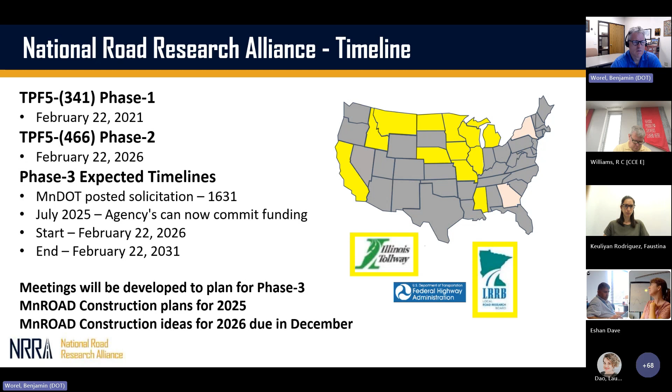So some activities that are going on at MnROAD. Again, construction ideas for 2026, we do have test sections available on the low volume road. So get your ideas in. We can have a little more time for planning for construction in 2026, but that's due in December of 2025, I should have stated.

So when I talk about phase 3, it's the same membership, full membership for governments, agencies, including the tollway, 75 a year or 150 a year for Minnesota. So that hasn't changed, that'll be the same. But there are a couple options that are going to be available.

Minnesota is working on having an implementation focus. If you wanted to add 30,000 a year to that, we could do some different things for implementation. It could be looking at different reports, but again, something we need to talk more about.

There is an option that some states have asked for, which is additional travel. In the pooled fund solicitation, it talks to it a little bit more. Minnesota's not going to do that, but for 10 grand a year, you get some more trips in there. And also there's an option like we've done before in phase 1 and phase 2. Federal Highway did this, Missouri did this.

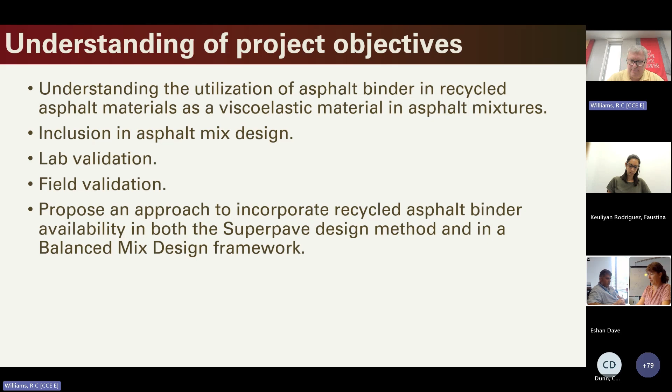It goes through, we're going to be conducting a survey or synthesis of NRRA member agencies' practices. We want to look at identifying test sites for high recycled asphalt material mixes. That's going to inform our experimental plan. Conduct field sampling and data collection.

Then, as is rather standard in NRRA projects, there's a 1-year annual report update. Then we're going to be doing lab testing, field distress, and performance data analysis. Hopefully the year 2 update coincides with the final report and publication. And along the way, there are presentations that members of the NRRA are welcome to have us provide updates on.

We can dive into the details of this, but basically we want to ensure we have captured the literature and what's the state of the practice, understanding what the NRRA member agencies who are funding this project do in practice, and seeing if there are opportunities to integrate that into our program and provide them with candidate, potential updates to what they're doing.

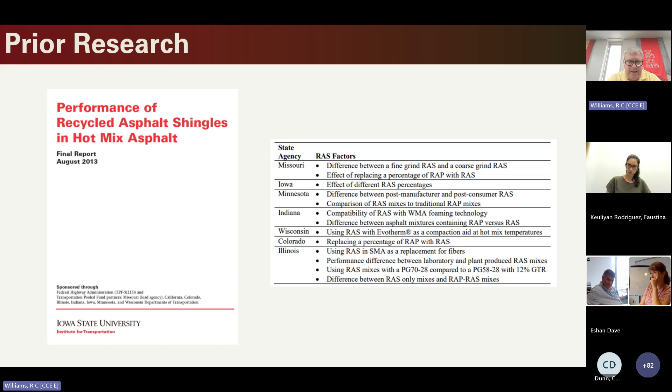Anyone who's worked with me knows that I have these storage facilities where, on larger projects like this one, it's kind of like the Indiana Jones movies, where you store your materials. So I have some of the materials in storage from these projects as well as other projects, and they could be useful in this study.

So then, development of the experimental plan. We're going to look at selecting what we call the control mixes, and test the control using ideal CT, disc compact tension, ideal RT, and the Hamburg test. We're also trying to identify the binder availability factor for the RAP.

We'll look at what the dosage is for the higher RAM mixes, and test the mixes using the ideal CT, DCT, ideal RT, and Hamburg. So, here's our standard mix design, which produces this binder content. But if we look at this binder availability concept, then is there an adjustment to the binder going in there?

Then we're looking at plant mixes. So again, plant mix, lab compacted testing, binder testing, RAP testing. The other thing we have the ability to do is...

We have some advanced systems where we can take the asphalt binder and create the SARA fractions in 100 to 200 gram fractions, per fraction, in less than about 20 hours or a day. Usually what we do is take those fractions, and we have the saturates, aromatics, resins, and asphaltenes, and then we look at some transition points in these fractions, so we can control exactly the molecular weight and how we divide these fractions.

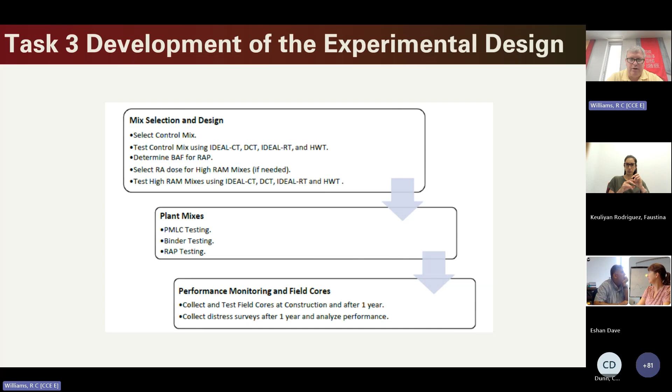Here we just have some examples of what we might be looking at in the experimental plan. Again, these are just hypothetical situations. So as we move towards 30% binder coming from recycled asphalt materials, it's going to be increasingly difficult to achieve that binder grade simply using, let's say, a crude petroleum material that has lower molecular weight to meet that spec.

And so then you're going to move into other kinds of recycling agents. AASHTO has a list of recycling agents that are qualified, and there could be other ones, but I'll leave that up to the NRRA panel to guide us on what they want us to examine. This is an example of what you can find with some of these blends that we see. And then if we look at the binder availability factor and apply that, how that virgin AC could increase.

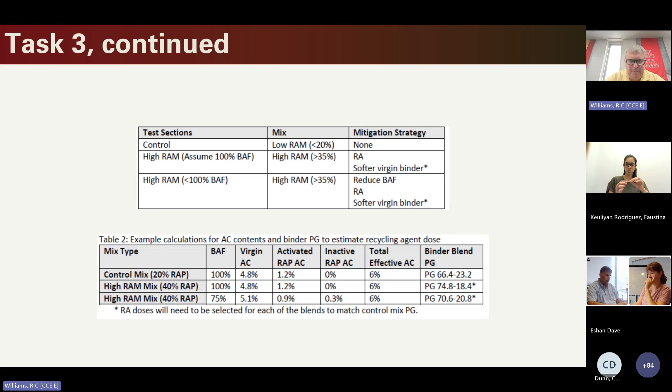Then we'll progress to the field sampling data collection. I think, of course, we're going to need to look at the plant type, the method of how the recycled material was added, the silo storage time, production rate, haul distance times, etc.

We can, on the one hand, be at a portable plant, 300 ton per hour production, could be a little bit further haul distances. But we could also be at a facility that's pushing 1,000 mixed tons an hour. They light the burner at the plant at 2:30 in the morning or so. They've got 12 silos. You're filling the silos up, and then the mix is sitting in the silo for 4 hours maybe for loadout, or even longer.

So there's things that I think we should go through and document what's occurring in the material production. Along with that, looking at mix temperature, compaction temperature, laydown operations, collecting the QC, QA data, and things of that nature. Looking at the mix constituents - if you're going to have a quartzite based mix, you're going to have different absorption values than, let's say, a limestone mix. So we need to keep track of those things as well. And of course, we'll be obtaining field cores.

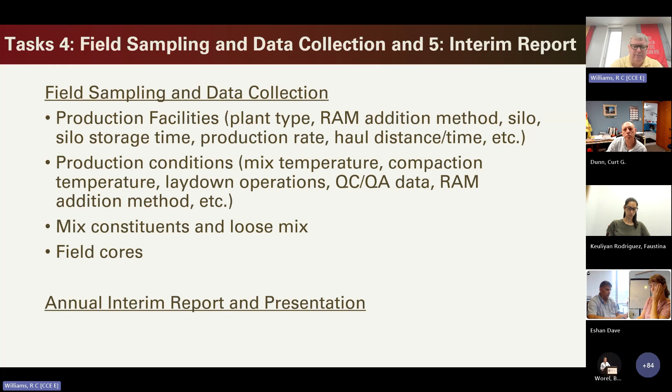Chris, sorry to interrupt there. Could you wrap it up maybe in just a half minute here? We've got some other updates here too we've got to get through.

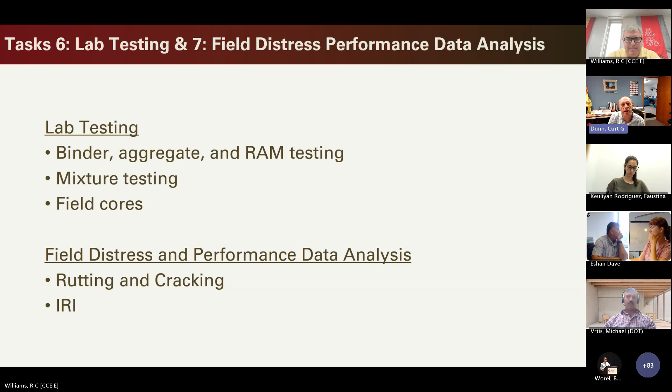Well, okay, sure. Anyway, I think all this is posted online, and so then we'll make the recommendations, and the oversight committee will review those and we'll adjust as appropriate. So I'll just say thank you and take any questions people might have.

I think we'll thank you, Chris, and if there's any states out there that would like to go in on this study, please let us know. So, just to stay on schedule here, thank you very much, Chris. And so I have - pardon me. Yeah, no worries, appreciate the opportunity. You bet. And so I'm going to turn it over to Michael here.

He's got a couple-minute update before we can move on, on some things happening at the test track. So go ahead, Michael. Were you going to share your screen? I'll bring it up. Yes, I will. Yep, all right, I'll bring them up here.

Yeah, thanks again, Chris, for sharing for the Flex team. Just wanted to give a quick MnROAD update on everything asphalt related, a little bit PM related, and let everybody know - really just planting the seed. And if you want more information, please contact us.

So we are removing the spray rejuvenator test sections on the low volume road. These sections have been in place for 4 years. We are at the end of the research contracts with those. We have year 3 testing that we recently funded through the PM team.

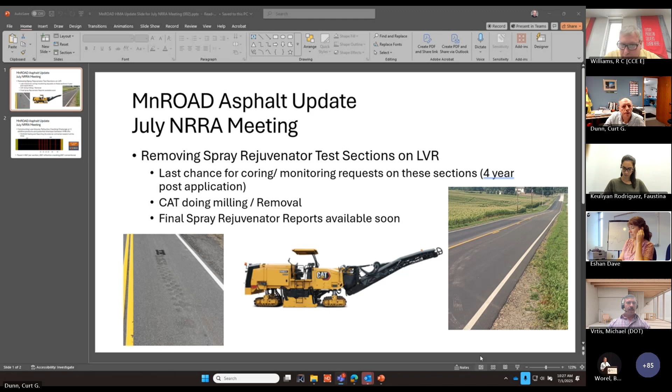We're going to be using this real estate. Caterpillar, through the MnROAD Caterpillar partnership, is going to be doing milling to remove those sections. They're doing something similar to what we did through the University of New Hampshire during MnROAD's last construction effort, where they're looking at mill speed, rotor spacing, tip spacing, those kind of variables. They're going to be playing with this area to mill up and remove those sections.

In place of those, we're going to be constructing a low volume road version of the MnROAD NCAT additive group, or MnROAD reflective cracking sections, where we have 3 different additive products. We're going to take our typical 400-foot test section and cut it in half. We'll have saw cuts in the lower common lift, and then evaluate both the low temperature cracking in the uncut portion and the reflective cracking in the saw cut underlying lift portion.

We're planning on giving a more thorough update in the July or August Flex team meeting, so just wanted to plant the seed here. Again, contact us if you're interested in learning more about these.

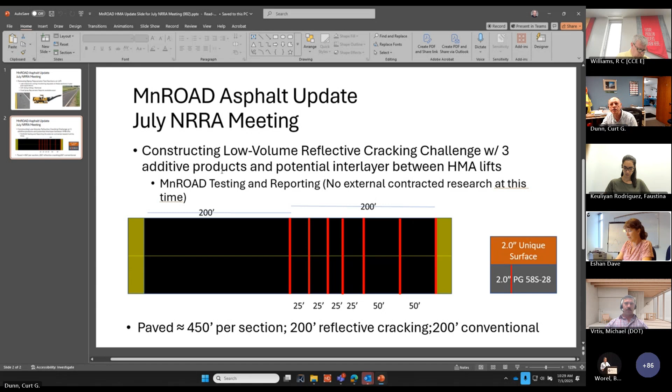Thanks, Curt. Okay, very good. Thank you, Michael, sounds like a really great thing going on here. So with that, I think I'll turn it back over to Ben.

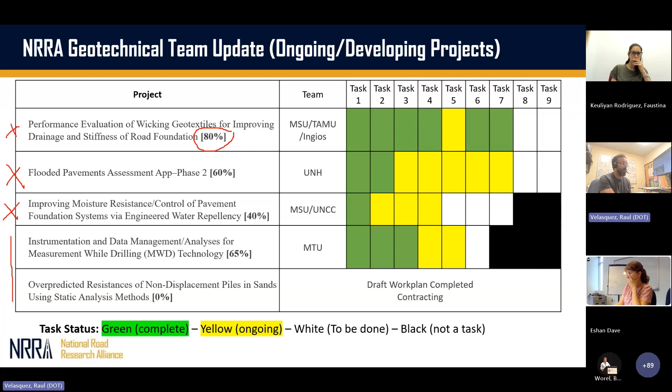They wanted to highlight the results from the large-scale laboratory testing they've completed. They indicated that moisture sensors in their experiments confirmed that the section reinforced with the wicking geotextile maintained lower moisture content during freeze-thaw cycles and rainfall simulations. Here are some pictures of how that large-scale testing looked, with those heat exchange elements.

On the right is the cumulative probability distribution plot, indicating that the wicking geotextile section, the blue curve here, shows up to 36% higher probability of experiencing lower permanent deformation compared to the control section, demonstrating enhancement in performance for both hydraulic and mechanical stabilization. So it's important to highlight that wicking geotextile provides both improvement in water management and mechanical stabilization.

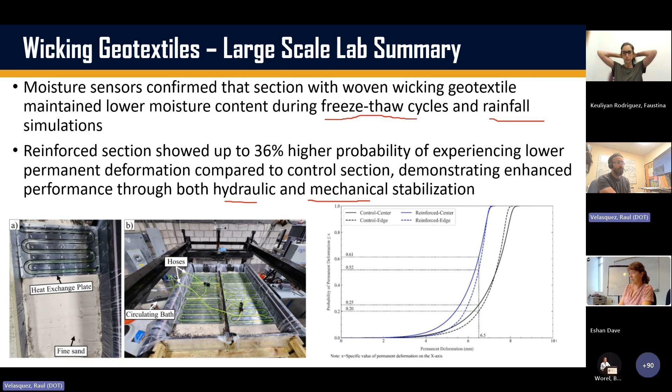For the flooded pavement app, work done by New Hampshire, they completed development of a beta version of the app called PaveSafe, and they are currently testing and validating it. Here we have some screenshots of the new features of the app, which are pretty interesting.

I like to highlight that they included a feature where you can input your unsaturated soil mechanics characteristics, specifically your soil water characteristic curve. You can input it by hand if you have lab testing results, or predict it using grain size distribution or typical literature parameters. It nicely shows how the model fits your soil water characteristic curve and your unsaturated soil permeability function.

Also, they improved the way to input hydrological inputs like precipitation, so you can specify your rain events nicely. They also included loading, typical classification vehicles, but also the FWD option. MnDOT usually uses FWD to determine if a road is ready for opening to traffic after a flooding event, so they included FWD loading for assessment of road condition.

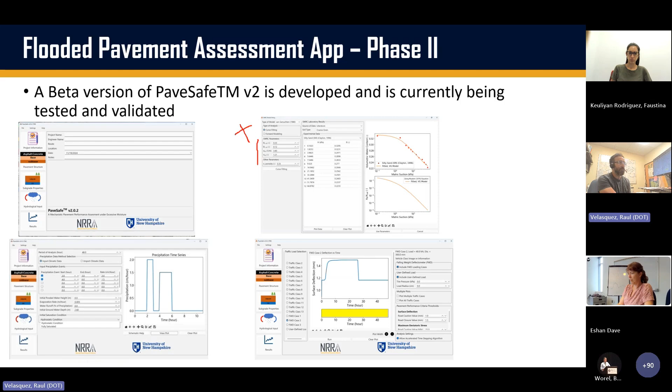Pretty nice feature. For the past year, they have completed extensive rigorous testing in the lab, as shown here on the left, to validate results coming out of the app and determine the impact of different moisture profiles in soil and the response of your foundation. A very sophisticated test system with a lot of sensors inside.

We look forward to the next update in our team meetings. I think they are scheduled for next month to provide a deep dive on the results from this app.

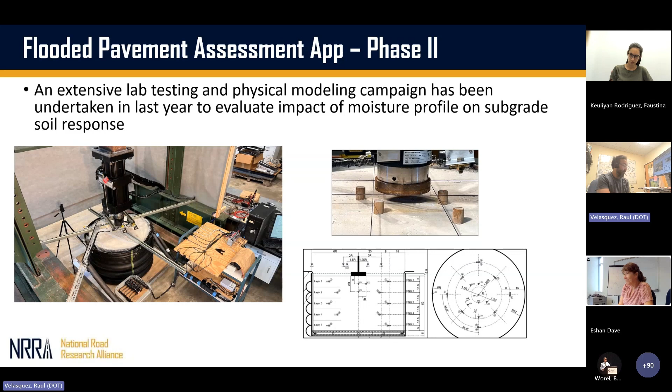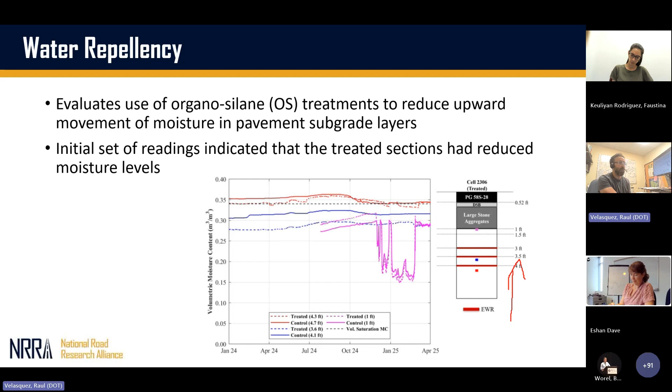For the water repellency project, they are working on evaluating organosilane treatment to reduce the upward movement of water, focused on cutting the flow of water going upwards in the pavement system. Initial readings from sensors indicate that treated sections, where the treatment was applied about 3 to 4 feet deep into the cross section, show reduced moisture levels. In this time history photo, the solid lines are the control sensor and the dashed lines are the ones treated with the water repellency material.

They're trying to back calculate the parameters of sophisticated soil models for simulating freeze, thaw, and heave using Plaxis, and so far they have been pretty successful in fitting those parameters. Then we're going to upscale into a more comprehensive model to simulate different conditions, like freezing delay, frost depth reduction, and how this organosilane treatment impacts water movement.

So that's it, that's kind of highlights the PIs wanted me to show in terms of what Geotech is doing recently. As Ben mentioned, there's been a lot of attention and engagement from members about the flooded pavement initiative. I call it initiative because right now there is no associated contract, we don't have a university or contractor working on that project, so right now it's just an initiative at MnROAD.

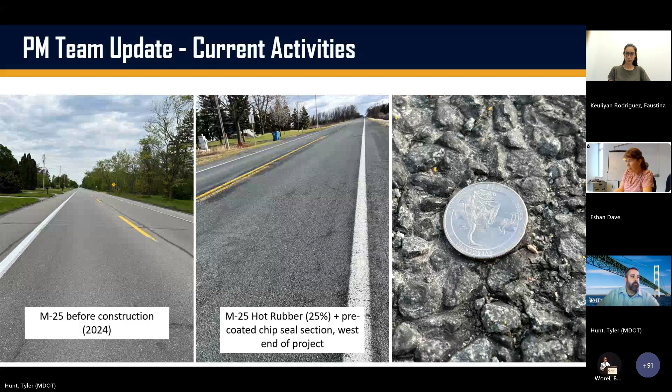We also have our second 2023 funded project, rumble strip durability. We have Faustina with us. If you want to take it over and give an update for us, I'd appreciate it. Do you want to share your screen?

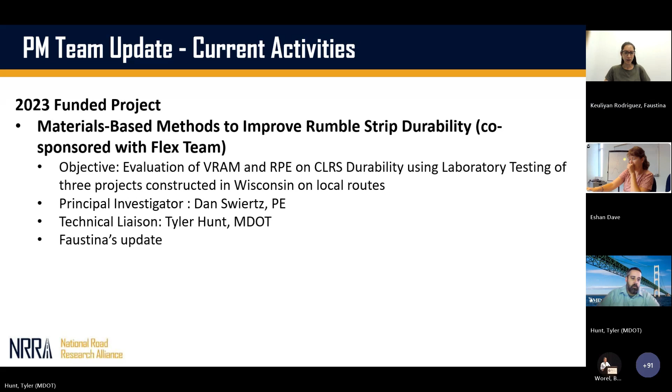Yeah, sure, if you don't mind. Yes, absolutely.

I don't want to be repetitive here because you've probably heard this several times, and even Dan presented at the conference in April, but I just wanted to give a brief overview. The project is essentially wrapped up. Can you guys see my screen here? Yes, we can. Great.

This project set out to understand: do rumble strips negatively affect pavement performance? There are a lot of assumptions and myths. We wanted to understand what they do, and if something has been negatively impacted, do material treatments help mitigate these risks? We had 3 field projects in Wisconsin. We cored them, with control sections and sections with rumble strips. The material treatments we evaluated were RPE, VRAM, and a combination of the two, so we did a top-down approach, a bottom-up approach, and both.

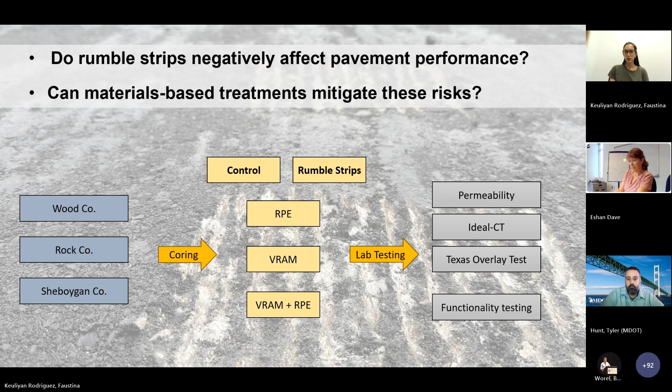In terms of lab testing, at a high level, we did more, but for performance we looked at permeability, Ideal CT, and Texas overlay. We also had a team on site doing functionality testing to measure inside and outside noise and vibration.

Essentially, the report for Task 5 is finished and has been uploaded to the website. I can share my slides later. We have the link here, but I'm sure we're all familiar with the NRRA website. As an additional deliverable, we created a one-pager to condense the main findings of the project. We tried to frame it around what people wanted to know about this project without having to read a 200-page report - just a high level, easy to use, easy to understand one-pager. The final report is under review by the editorial board.

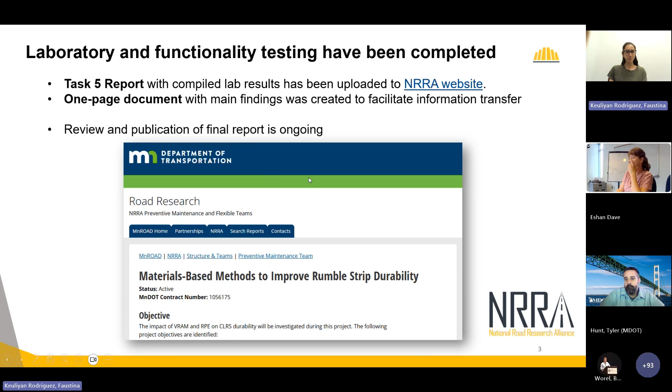If I have enough time, I'd like to quickly go through that one-pager to share with the team. I think Dan shared it as a preview during the conference in April, but I'm trying to share here. Okay, I believe you can see it.

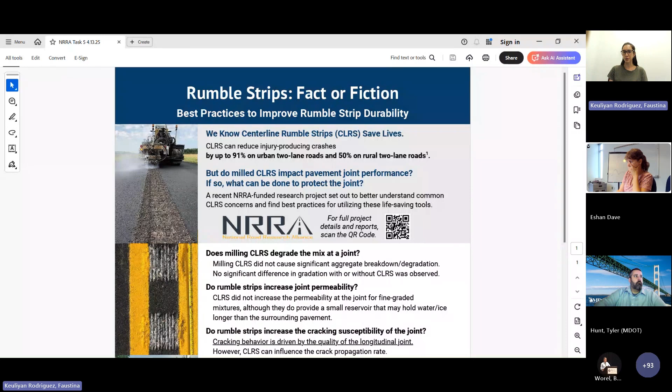This is what we came up with as a one-pager based on the known and recognized safety benefits of rumble strips. We wanted to understand moving forward what they do in terms of pavement performance. Big question: does milling of rumble strips degrade the mix? We didn't find any significant degradation based on our gradation results, meaning that the milling itself does not harm the integrity of the aggregate at the joint.

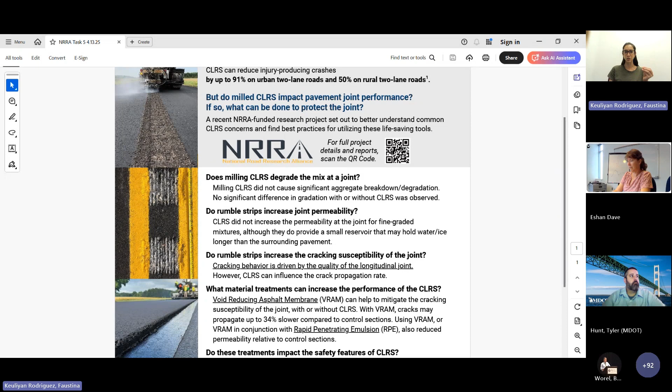In terms of permeability, our main finding was that we did not see a significant increase, although I should add that these were all fine-graded mixtures, so our permeability for the control was already pretty low, meaning our baseline was already low. They do generate a reservoir for the accumulation of moisture, and we were unable to do long-term aging on these cores because we started losing integrity.

You can read more about it in the report, but one big portion of this would be to further understand long-term performance, which we hope to do in the future. In terms of cracking susceptibility, we found that the main driving factor of the cracking behavior is not the rumble strip, but the presence of the joint.

So our starting point has to be constructing a good quality joint. We did see through the Texas overlay test that the rumble strips increased crack propagation rate. To mitigate that, we found that adding VRAM at the bottom helped reduce that propagation rate after the addition of rumble strips. The addition of RPE contributed slightly for permeability as well as crack propagation rate. This is mostly driven by VRAM, but the RPE adds an extra benefit.

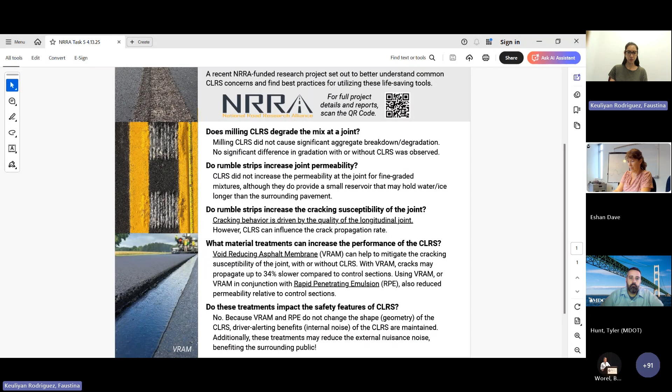In terms of safety, outside and inside noise and vibration, our external study showed there was no negative effect of these treatments. In fact, they do help maintain inside noise and vibration while mitigating the outside nuisance for the surrounding areas, which is promising, which is desirable, I guess.

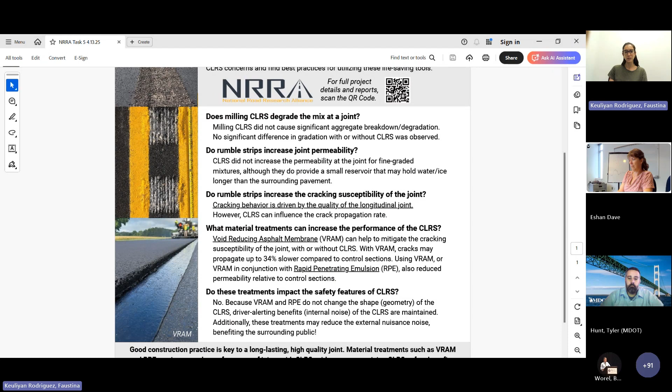So the key takeaway for the project is that for performance of the joint, the key component is a good quality joint. That will drive everything else. And then as an additional risk mitigating strategy, the use of these material treatments is a helpful tool.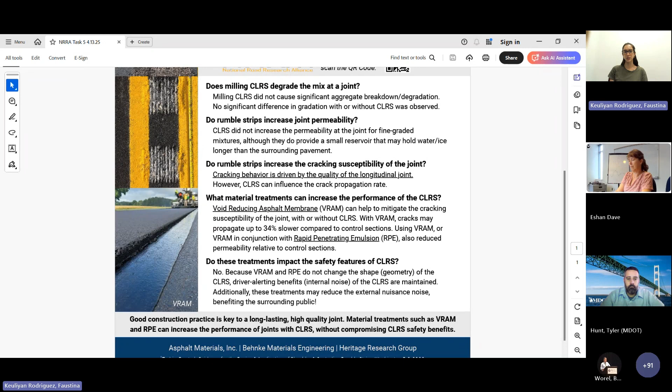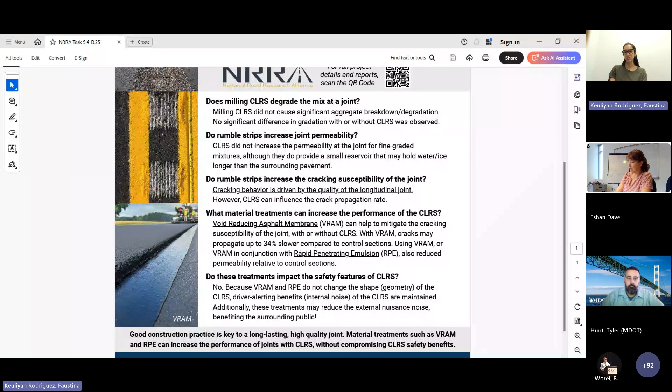Again, I went quickly through this. I'm sure several of you have heard about this before, but I wanted to share this update with the team. This, as well as the Task 5 report, are both available on the website currently. And that's all I have.

Thank you, Faustina. Appreciate it. I'm sure many have seen it. I just want to make sure folks who weren't at the conference had an opportunity. So I appreciate you doing that for me. Yeah, I'm going to tilt the screen back here.

Dr. Dave, are you on? I have you up next. Yes, Tyler, I'm on here. You can just call me Eshan.

So I don't really have a slide on it. That's not really the project title you listed. I mean, that's not directly the title of it. What I wanted to talk about is Thinlays, but also really looking at the results coming from the original I-94 westbound test sections, which did include some placed as Thinlays. So it's a joint effort between this PM team and the flexible team, using the NRRA phase 1 reflective cracking study cells, also in parallel to the reflective cracking challenge that's ongoing right now.

As I mentioned, several of these were placed as thin overlays or Thinlays as a treatment. As you know from previous quarterly meetings, those cells have been removed just recently. They were on an original, very old alignment of I-94 with rigid pavement underneath. However, through the efforts of Michael Vrtis as well as others at MnROAD, they were able to core these sections, and now we have received these cores during the last month, and we are processing them in order to conduct some testing that also allows us to look at how aging has changed the properties.

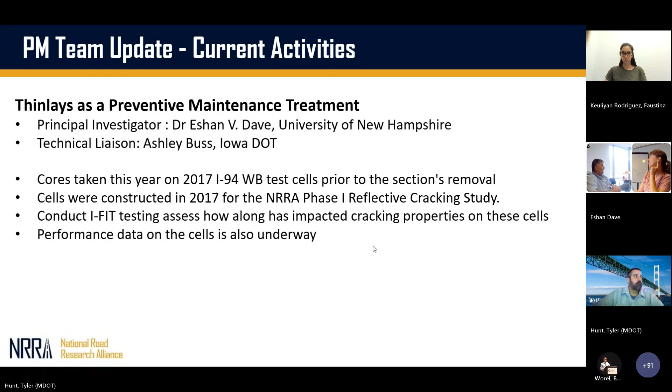So I just have a couple quick slides, Ben. I'll turn it back over. Yeah, we are running a little late, so I'll breeze through these. The spray and rejuvenator section, Michael already covered that. Heidi is still working on getting that addendum done to the partial depth repairs, and I'll skip this slide. So I'll turn it back over to you, Ben.

Yep, and thanks again, Tyler, for all that you do for NRRA. I'll go to the rigid team and Tom.

All right, so Tom gets his slides up here. All right, thank you, Tom. See, I'm not hearing your voice, so you got to unmute. Sorry about that. No problem. Take it away, Tom, be quick if you would. When does this end, at 11? It does end at 11. I think we'll go to 11:30. All right, so never mind, I'm pushing people too fast. A little panic there, take your time, Tom. Okay, thank you, thanks Lauren.

All right, I don't really have any rigid team updates. However, I'm going to spend the time talking about the performance of some older test sections because I got a call from Jacob Calvert, who is becoming popular this morning, saying, you better get out here, the cells are cracking up, what are we going to do? And so I went out there and took some photos, and I think we're going to be okay for a while. I just wanted to share the performance of these particular sections that have been out there quite a while, and they're kind of interesting test sections.

Tom, I think you muted yourself, Tom. Yeah, please. Thanks, Eshan. Hit the wrong button, Tom. I certainly didn't go for it, but anyway, is that better?

Great, yep, okay, so these are ultra thin concrete overlay, fiber reinforced concrete overlays, and these were constructed in 2013 on the low volume road. I believe this idea was introduced by the local concrete paving association, looking for some thinner alternatives to overlays that could be done on existing concrete roads. Part of that was, at this time, this new thing called geotextile interlayer was really becoming more popular, so we introduced that as well. The idea was to put down a geotextile interlayer and then put a very thin concrete surface on top and see how it does.

And there was some validation. There was at first an experiment at the University of Minnesota in an accelerated testing machine called the Minne-ALF that showed it was able to survive quite a few load cycles. So we had a little bit of comfort that it wasn't just going to bust up right away. And then because it's on the low volume road, it gave us an opportunity to compare how this thing performed with traffic loads and with just environmental loads only.

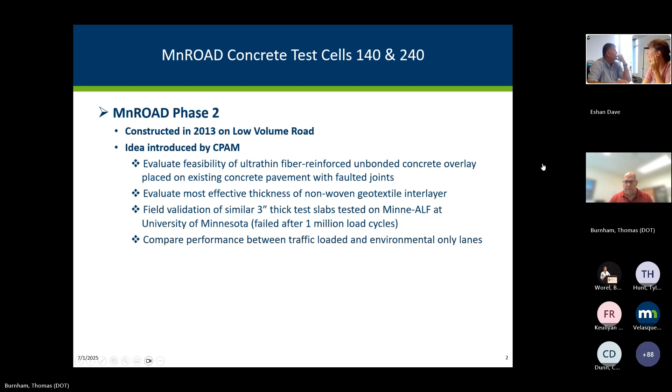It's not cooperating as far as advancing the slides.

All right, so the design details: again, this is 3 inches of fiber reinforced concrete overlay, so extremely thin, small panel sizes, which are necessary to handle the warp and curl, 6x6 panels. This was put on existing cell 40, which was an original test section, and that happened to be a thickened edge design where it was about 5.5 inches at the center line and 7 inches on the edge. It was kind of a very older design that MnDOT used to do long ago. It had skewed joints and they were not doweled.

And by the time we got to 2013, it had quite a bit of significant faulting from the traffic side, up to 5 millimeters. So that's almost 1/4 inch. So this was pretty faulted. That was pretty good test for whether we can put a non-woven geotextile on something that faulted and whether it would cause some issues.

As far as the fibers that were used, in this case, back in those days, we were looking at 20% residual strength ratio according to the C1609 test, which is kind of a residual strength test. And what we ended up with was a dosage of 6.5 pounds per cubic yard of this particular polypropylene structural fiber. As far as the fabric interlayers, we went with 2 weights. One was a standard weight, which we used for most thicker pavements, which is 16 ounces per square yard. And then we went with something about half as much weight, so about half the amount of thickness as well, just to see how these things performed.

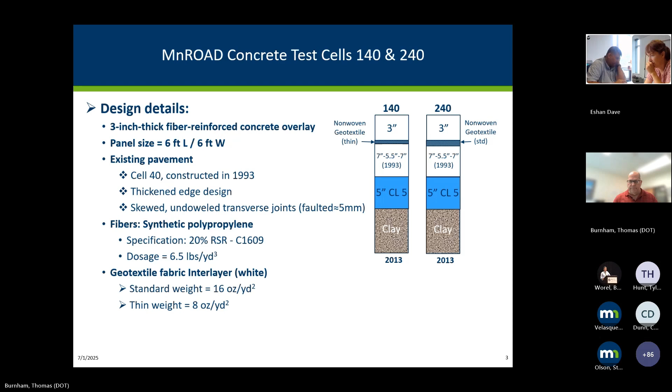So what did cell 40 look like? It wasn't too badly cracked, but again, pretty significant faulting. So it wasn't really busted up. So we felt pretty comfortable trying this on this particular section, but it was really more of a test about those faulted joints.

Again, you can see some mid-panel cracking going on longitudinally, in both lanes, a little bit worse in the driving lane, which is to the right there. The inner side received most of the traffic. Actually, since this was an original cell at one point for several years, up to about 2008, it did receive, one day a week, a 102,000 pound load versus 4 days a week would be the 80,000 pound. So the outside lane had received some traffic, but since 2008, we adopted to leave that as environmental only and will no longer load that side.

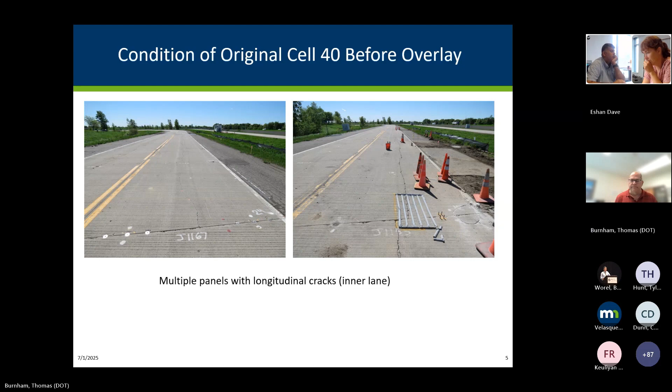You can see here preparation for some of the instrumentation that we put in there. At this time, we also started working with North Dakota State University with some fiber optic sensing, so they brought their sensors out and installed them on top of the existing surface. You can also see that small gray object is a thermocouple tree that we installed, and then also some dowels to hold some sensors that we were going to put in to measure what's going on as these joints underneath are opening and closing.

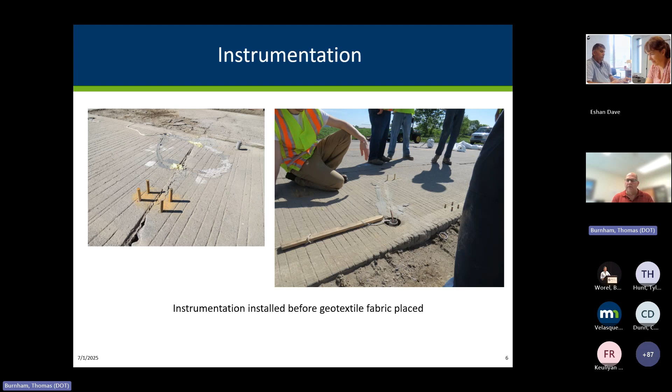So then we installed the geotextile interlayer, which at this time was kind of a newer concept. MnDOT was slowly adopting it, starting to be used around the country. One of the challenges is always trying to anchor that to the existing pavement, and up to this point it had always been shooting nails into the concrete. Didn't always work, sometimes it got shifted around by traffic. So this was the concept that came up: why don't we try gluing it down?

3M, who is in Minnesota, came up with a magic potion, which I think they kind of said is based on the stickiness of your Post-it note. They brought out this thing, sprayed it down on the pavement, and we put the fabric down, and it held actually very well. It has the added bonus that if it gets a little wrinkle, you can pull it up and reset it. So it worked pretty well. I don't know if that was the first application, but I believe it was.

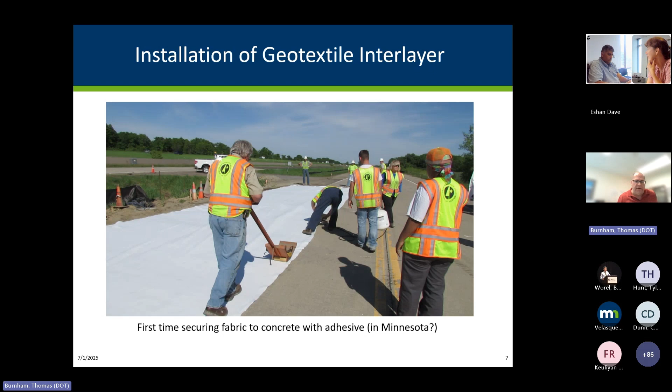Paving went pretty well, except again with 3 inches the paver went very quick, so they had to keep up with finishing and getting it cured and everything. But nevertheless, it turned out pretty well, given they weren't used to paving something as thin as 3 inches.

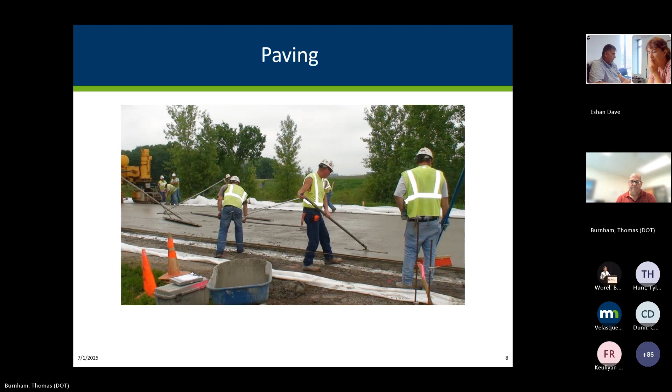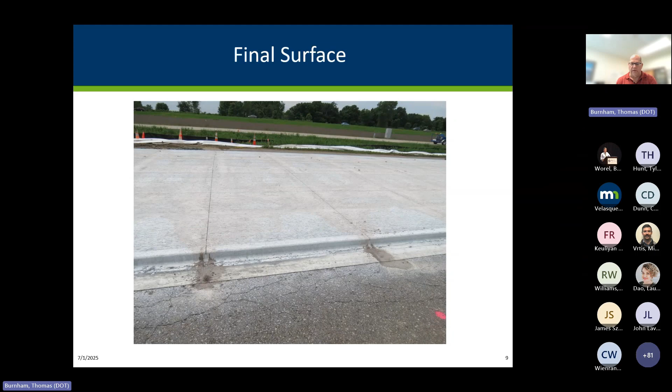So this is what it looks like afterwards. Again, the 6x6 panels got some good longitudinal texture on there. You can see the fabric a little bit carrying over on top of the shoulder there.

So after about a year, we had a few panels show a little bit of transverse reflective cracking. Wasn't overwhelming. You can kind of see we snapped a chalk line there to show it, because it's hard to see the very tight crack that formed over an existing joint. We really didn't see too much of that.

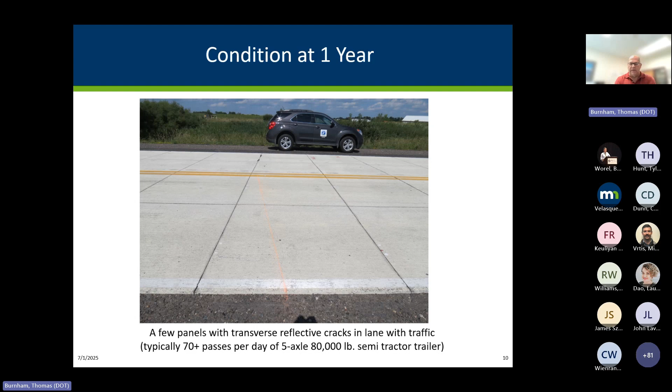Just to give you an idea of how much traffic this particular section gets, it's at least 70 passes per day of an 80,000-pound tractor. So it's pretty heavy loading for something this thin, but that's part of the accelerated portion of MnROAD. If you can demonstrate it can take this beating, you have quite a bit more comfort in a normal setting, maybe a city street where you're certainly never going to see that much traffic for many, many years.

So cell 140 is the one with the thinner fabric, and you can see it took up to about 4 years till we started to see a little bit of significant cracking going on. Again, very tight cracks—I think the fibers are doing their job. We did have a transition between the two legs of the low volume road, and that's why you see a little bit more cracking where the traffic would come off that transition, with a lot of turning traffic in that location. That did tend to crack a lot sooner and a little bit worse, but nevertheless, at this point the cracks were still pretty tight.

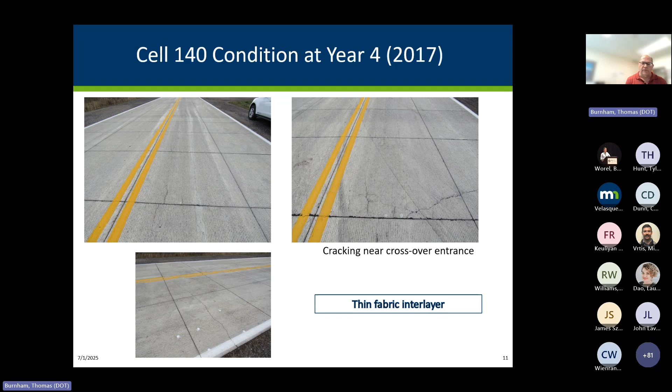At the same time, this is the one with the standard fabric, a little bit thicker. Again, faint longitudinal cracks starting to appear at year 4. We had one reflective crack that happened even in the original section—it busted up because they had some poor compaction of a conduit going across the road, and that reflected right away. That crack formed pretty quickly, even after about a year, and it's been there ever since. Again, the fibers are keeping it together.

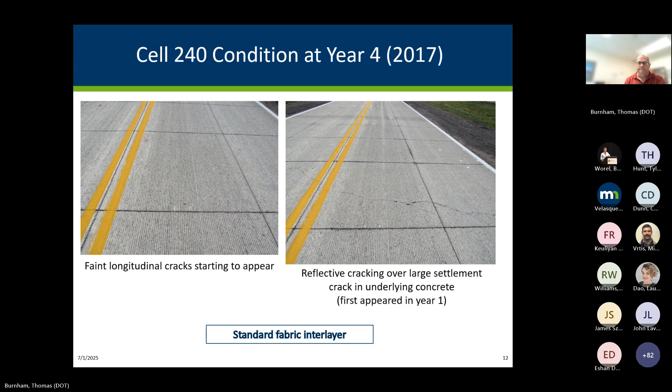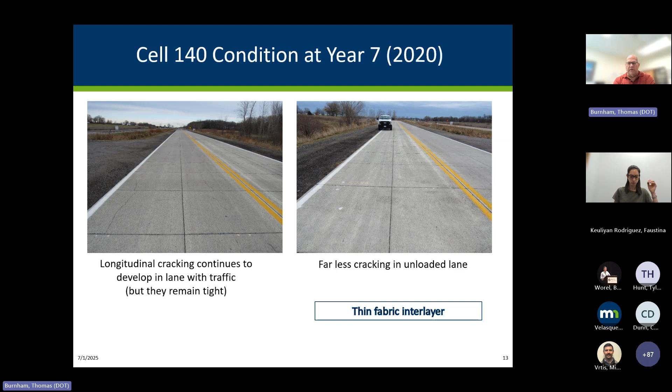Year 7, longitudinal cracking again. More and more cracking showing up, again longitudinal in this case, especially in the left photo—that's looking back, so that's the loaded lane on that side, and then the opposite on the other one. We did get a little bit of cracking going on in the environmental non-loaded lane. We do get some traffic that goes on it, so maybe you can't say it never gets traffic, but it's much, much lower, and we intend to traffic it as little as we can.

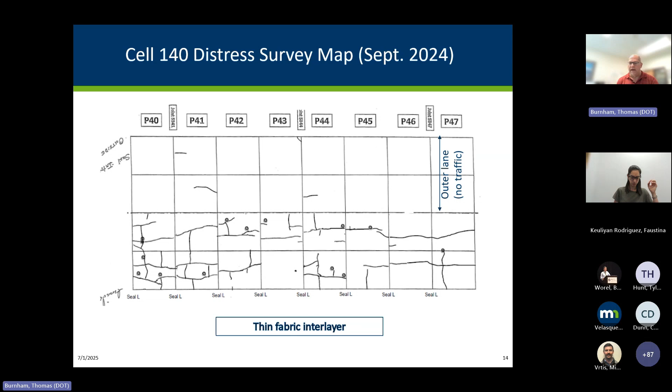So as of last fall, this is what the survey looked for. The distress survey map looked like this for cell 140, which is the thin fabric interlayer. You can see quite a bit of difference between the driving and the environmental lane, and you can kind of see the cracking pattern—predominantly longitudinal, and then sometimes eventually they connect across. Again, all of these cracks are being held pretty well together by those fibers.

Then you look at the standard fabric, quite a bit less cracking. It's not to say no cracking, but quite a bit less with the thicker fabric.

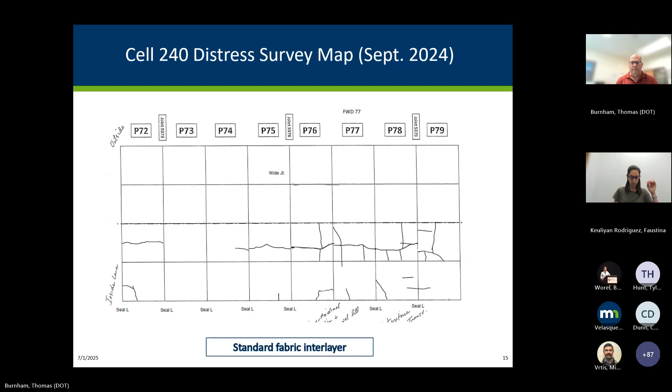This was just taken earlier this month, or last month. When I got the phone call, I went out and snapped some photos. You can see there's a lot of cracking going on in these sections, but they're being held together with those fibers, and there's really nowhere for it to go because you've got a good concrete base. So we can probably get many more years out of this, although at this point we'd probably say this experiment is done and we'd like to replace it with something else.

At this point, you can see we've had about 106,000 laps of an 80K semi. So this is pretty robust stuff and still together. You'd have a little bit of comfort using it in a lower volume setting.

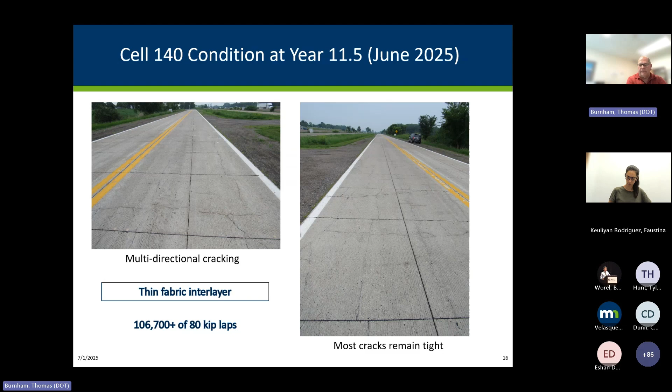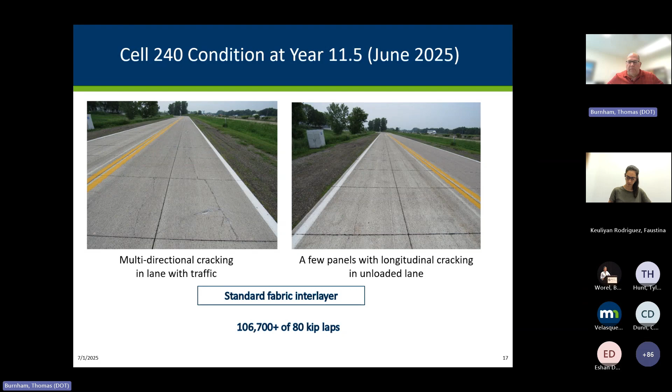This is a thicker fabric. Again, a little bit less cracking on both lanes, but much less than the thinner fabric.

One thing we did hear from the standard weight fabric was the report of clicking sounds, which is likely caused by the compression of the panels on top of that fabric. You have to consider that these panels are very light compared to the loads—about a 1,350 pound panel—and you're putting a minimum weight of 6,000 pounds with your front tire. So these things are really getting compressed and moved around.

Another thing we saw was a lot lower stress on this thicker fabric, found by the fiber optic strain measurements, where the values are much, much less when you have the thicker fabric. In other words, lower stress in the panels with thicker fabric, and you get less cracking.

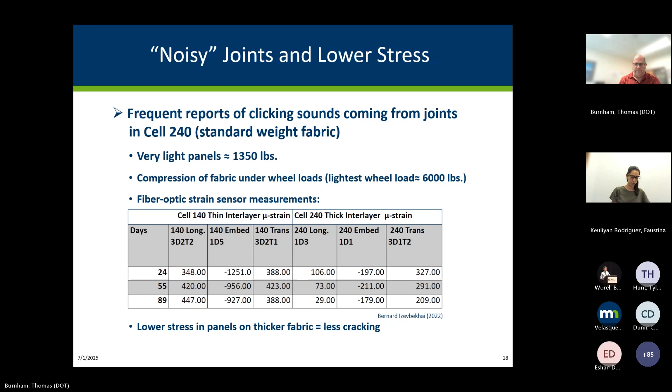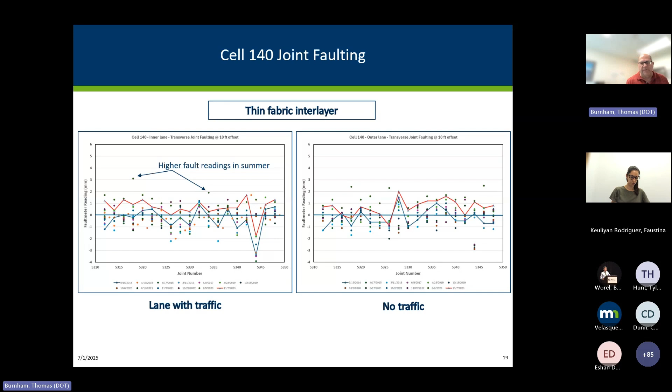Joint faulting—we didn't know what to expect. It turns out that whether it has traffic or not, it really hasn't developed faulting, and you wouldn't expect it to with the fabric. Some of the higher readings you see might be in the summertime, when the joints are completely closed with the expanded pavement, and sometimes they'll pop up a little bit and look like it's faulted, but nevertheless, not much change going on there. That's for the thin fabric as well as the standard fabric. So development of faulting is really not an issue, and we didn't expect it to be.

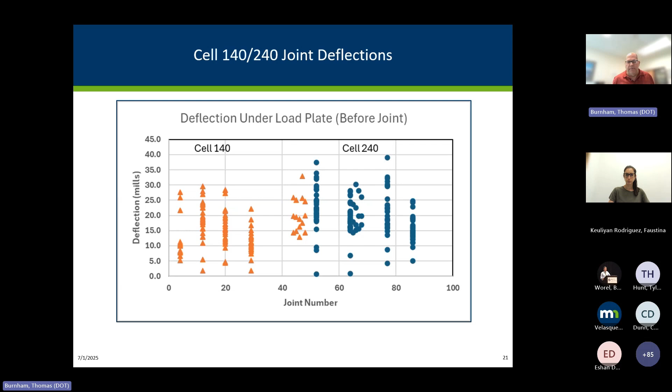Looking at joint deflections, you can easily verify with the deflection under the load plate of an FWD that the deflections are quite a bit higher with the thicker fabric. But as far as load transfer efficiency, we don't see any difference. In fact, because of the range here, the fibers really aren't enhancing the joint performance—they're just kind of along for the ride.

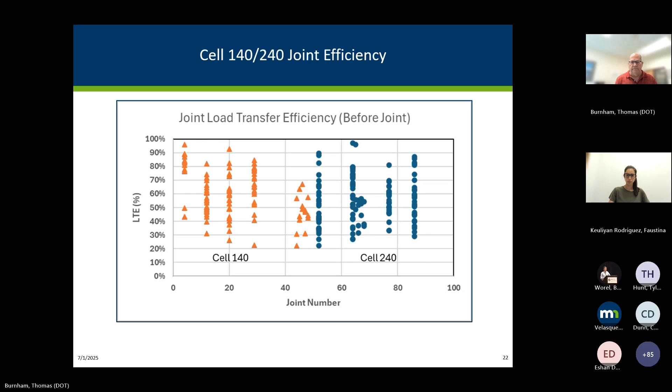So general observations: the type and dosage of fibers used in these cells have functioned well in holding the panel cracks tight together, but they haven't really proven to help in joint load transfer. We found that with other sections as well. And the thinner fabric resulted in panel cracking earlier than the standard fabric.

Also, the standard fabric caused more audible joint clicking, and I know there was some work done by Bernard Hoegh, kind of looking at a little more sophisticated analysis into the sound produced by the two different fabrics. There was little difference in joint faulting performance between the fabric weights and also the level of traffic—in other words, faulting really wasn't an issue. And the joint deflections, again, are much higher on the standard weight fabric, which is kind of what you'd expect.

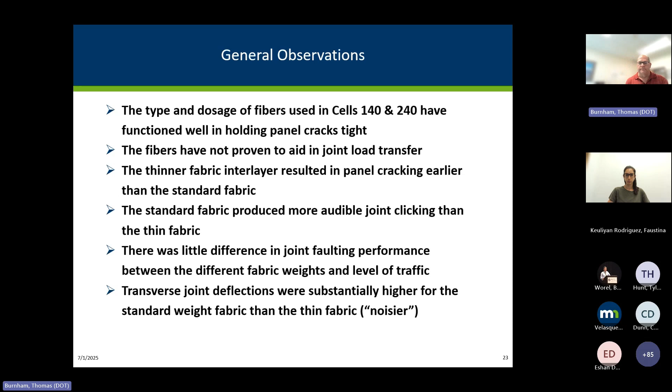So in conclusion, the fabric interlayers in this application served well in reducing reflective cracking from the severely transverse cracks, and we've been finding that in other places as well—that the fabric does a good job of reducing reflective cracking. Based on the survivability of these, given the heavy loads at MnROAD, this is maybe something somebody might want to look at in a much lower volume road application, like a city street. You probably have an issue though if you had curbs, since you're losing some of the depth of your curbs. But it does prove that it's feasible to use a design like this in a much lower setting.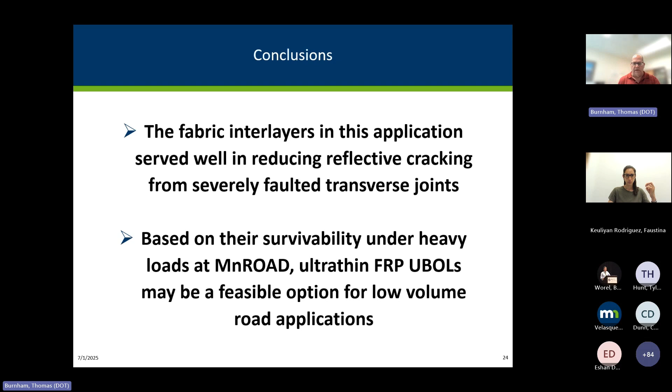I guess, Tom, when you talked about the clicking of the road, that's when you're driving across it—the wheels hitting the road, which has different sounds to it. Just to clarify that a little bit.

Is there more to it? What do you mean by clicking then? Well, I guess more like a thumping. You could hear the compression of the air, the compression of the fabric. So yes, normally you'd hear the joint clicks just with the tires going across, but there was something more to it.

And that's something you'd maybe have to consider in a residential area. You wouldn't want your pavement kind of pumping and becoming irritating to people. So could you hear that on the side of the road?

I've experienced extensive joint banging, audible banging. You'll hear it early in the morning when the joints are more open or during cooler weather, and I've actually witnessed it disappear in the heat of the afternoon at the same site. You might hear that and feel the vibration in your feet. Then you can watch it disappear as the slabs curl themselves flatter and stretch out a little bit in the afternoon.

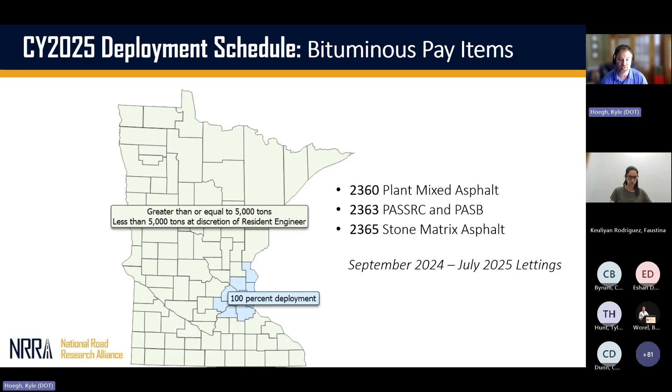Right now with these pilot projects, it's being sent to a VEDA center on the cloud, and that's the means that the data is being transferred from the site to all the people who need to have eyes on it. This is an asphalt effort for these pilots, but there's also an effort to get the MDMS for concrete too, and there's some contractor and supplier limitations they're working through. But there's been multiple meetings, and it does look like, last information I got, that there might be a project or two piloted for structural concrete here in Minnesota too.

One thing to mention here with the MDMS is, if these projects continue to go well, the goal for this fall, or as soon as possible, is to get this VEDA MDMS capabilities out to the other states, so they can start using and benefiting from what's going on there.

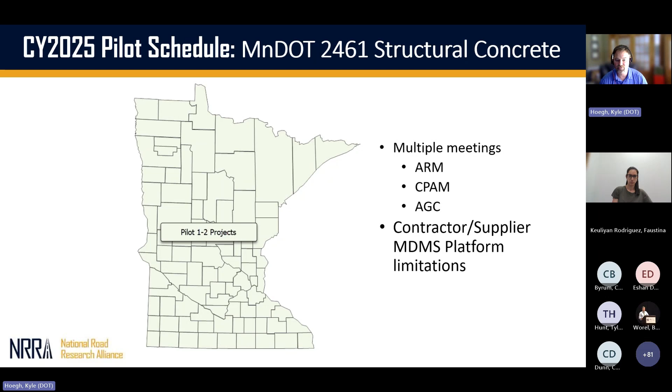And it's also exciting from a DPS perspective, a dielectric profiling system for compaction analysis, because it allows us to track where all the mix is coming from, which helps us with our calibration.

So another update for this group is that we have a date for the initial pilot for roller mounted DPS in Minnesota. As we started getting this into place and reported on it internally, both for John Garrity, our bituminous engineer, and Rebecca with the AMT unit, they have these periodic updates. Another contractor is now interested, so we might have another pilot sooner, July 18th this month.

What's exciting about this is the traditional way we collect dielectric profiling system information is to try to map it out after the fact with either a truck mounted system or a push cart. But having it mounted on the actual roller frees us up both logistically and personnel wise, and also gives us more real-time information.

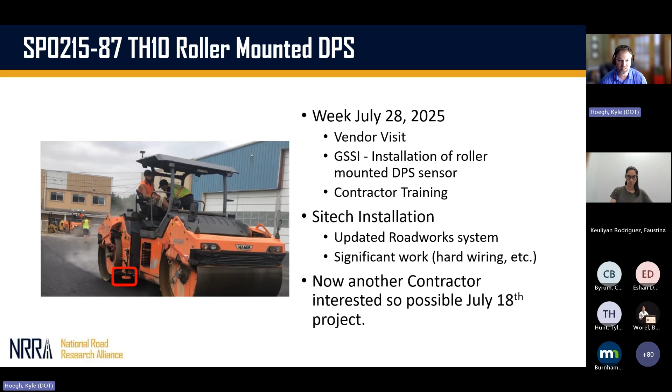And then of course, intelligent compaction is already kind of set up for being able to transfer the information, and we already have a template in place. We're basically just adding another sensor to the intelligent compactor. It'll be exciting to see how that goes later this month.

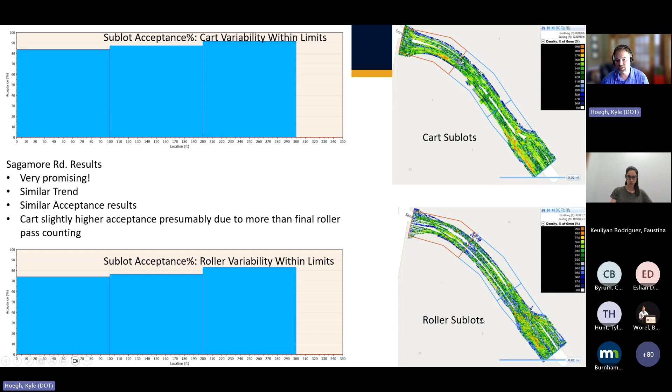We've got our hands on some roller compactor data, in comparison to the more known technology, which is the push cart. The long story short for these next couple slides is we're seeing very similar lot to lot comparisons between what we get from the cart, our known technology, and what we're getting from the rollers. So we're going to continue these comparisons to see if a low spot we're seeing with the cart also shows up as a low spot for the roller mounted DPS.

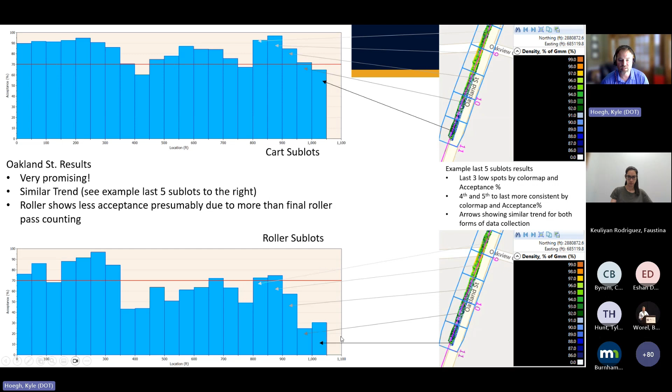I mentioned before that the MDMS is exciting for DPS integration, in the sense that it helps a lot with our calibration. It turns out with the DPS, what we're measuring, the dielectric value, corresponds really well to bulk specific gravity changes, or depending on how you want to present it, percent GMM relationship. But the key here is it has to be the same mix, or a very similar mix.

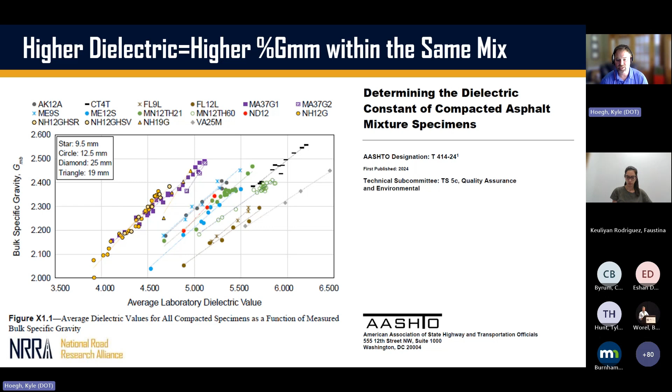Thankfully, mixes don't change too much within the same project. So as long as you're locked in for the specific mix from the specific aggregate sources, you're in pretty good shape. But there are times, especially if there's a limestone to granite swap or something like that, where you can see a shift in our predicted percent GMM just based on the aggregate blend change, which we need to catch, because we want to use DPS to catch changes in air void content, not accidentally miscount a change in aggregate as an issue with actual density out in the field.

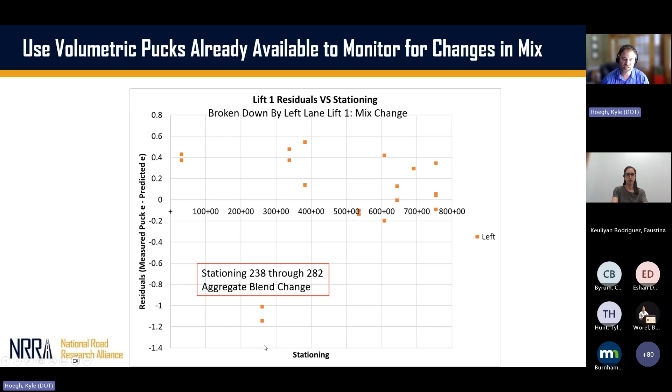So the idea is, instead of having to back calculate based on tonnage where these blend changes are occurring, we should be able to know with MDMS and Veta these same comparisons we're doing with IC roller pass counts, paver stops, or thermal changes and their effect on our density out there with the DPS. We can do the same thing with aggregate changes if they occur in the field, and measure the dielectric of the volumetric pucks that way to track it.

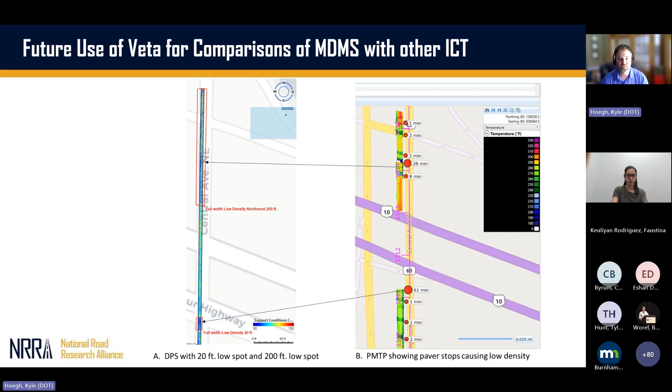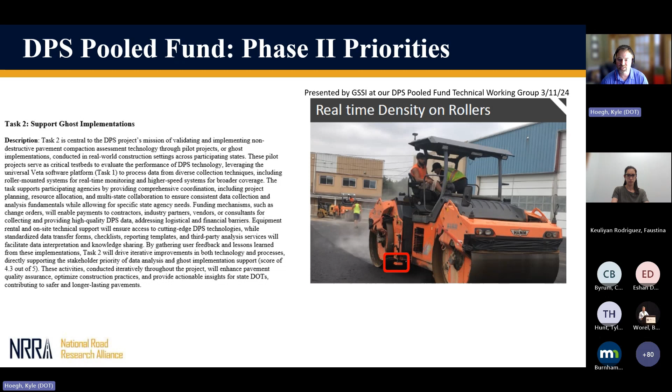Towards the end of the update, I wanted to mention the DPS transportation pooled fund that actually just got authorized today. A big part of that is going to be supporting GHOST implementations for the participating states. I'm really hopeful this roller mounted DPS will work, because that's going to allow us to not just pilot it here in MnDOT, but also support GHOST implementations for those participating states, and see if they can also get some density mapped out with DPS too.

The big picture is, like I said before, when we have this technology on the roller, the contractors seem pretty excited about it, in the sense that now, as part of their IC operation, they can actually see the compaction curve, and maybe it'll help them be more efficient with knowing when they've had enough roller compactor passes with that specific roller on that specific project. Or maybe it's deficient in certain areas, and they'll be able to catch that before it shows up on a core, or eventually for incentive disincentive with our quality assurance using DPS as an agency.

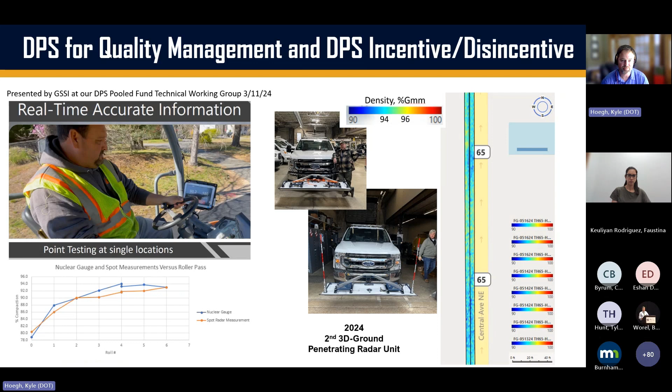So with that, I'll open it up to the group if we have time for questions or anything you want to discuss. And thanks for the time, Ben.

Yep, any questions for Kyle? Lots of wonderful work he's working on with his team. Curt? No, I don't have any questions. I just wondered if anybody had any for Chris. I know I had to hurry a little bit there. Is there anyone that would like any for Chris? Yeah, let's just open it up for any questions on the presentations.